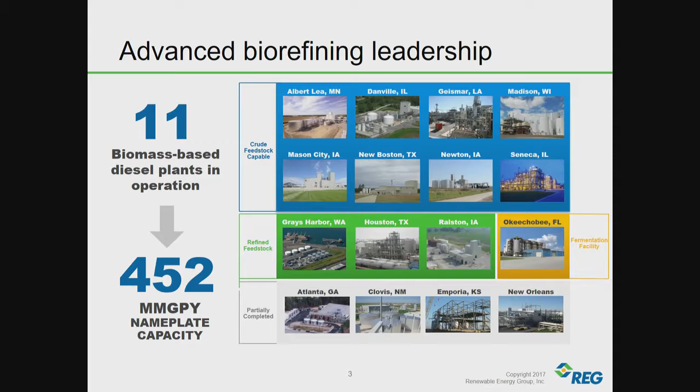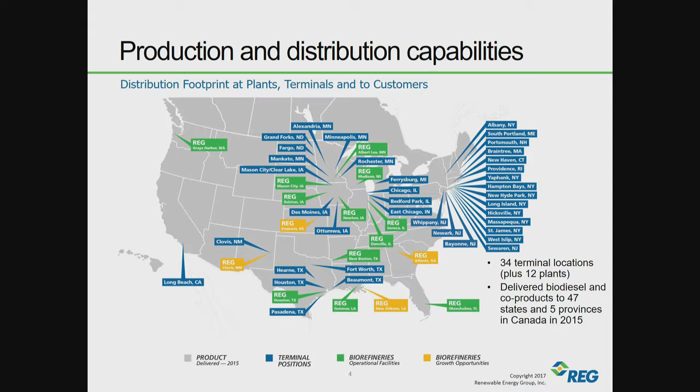And then one of those is a fermentation facility, which is a new technology for us in Okeechobee, Florida. It's kind of a pilot scale plant. We have production and distribution nationwide, so you can see the greens are production facilities, blues are terminals where we distribute material, and the yellows are the plants that are incomplete. So we are a nationwide company and a global company in that regard as well. We have a couple of plants that we own a significant majority of in Germany, so we do have international production and distribution now as well.

This is a photograph of the renewable hydrocarbon diesel plant in Geismar, Louisiana. This is our REG Geismar plant. I think it's worth looking at the picture. Those of you who've been in a conventional biodiesel plant can see right off the bat that it's a little bit different. It's very similar to petroleum processing, and I'll get into the details of how this works, and you'll see why. So a little bit different environment, a little bit different set of things to take care of. The plant's nameplate capacity is 75 million gallons per year. That's of all fuel products, and I'll explain what that means in a couple slides. And it is what we call a feedstock flexible plant; it can use both high and low free fatty acid feedstocks, crude or refined.

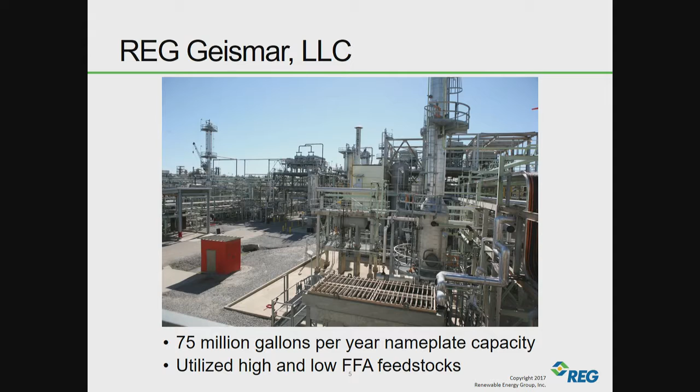So jumping right into a bit of vocabulary. There's some words that we use in the RHD industry that we don't normally hear in the biodiesel industry. First one is hydrocarbon, and this is actually an important word for fuels in general because hydrocarbon has been incorporated into the ASTM standard for diesel fuel. ASTM D975 recently clarified that diesel fuels are hydrocarbon oils. What that means is they're made up of molecules that consist only of carbon and hydrogen. Biodiesel is different. Biodiesel has oxygen in it. It's an oxygenate. So biodiesel or methyl esters would not actually be a hydrocarbon from that perspective. Hydrotreating is another very important word for making renewable hydrocarbon diesel. The way you get the atoms other than carbon and hydrogen out of a molecule is typically by hydrotreating. So we use hydrogen to remove non-carbon or non-hydrogen atoms.

And I noticed a lot of you still trickling in. There are some prime seats right up front here, and I will not be offended if you want to walk up there. I felt bad for those of you on this side of the room because the only screen's over here. So don't feel bad about just moving over, because I'm going to get to some pictures in a minute that might be a little bit hard to see from that side.

So we hydrotreat molecules to make them hydrocarbons. Think of it that way. There's a side effect, and it's a beneficial side effect. When you hydrotreat molecules, you can also remove double bonds.

The chemical term for that is saturating or saturation. So you turn an unsaturated molecule into a saturated molecule. I have a picture there that can show you what that looks like. Then the final step, after you've made a bunch of saturated hydrocarbons, very good materials, they burn great. The problem is the melting point is pretty high. Okay, you've heard paraffins. Most people hear the word paraffin, they think of candle wax, so something like that.

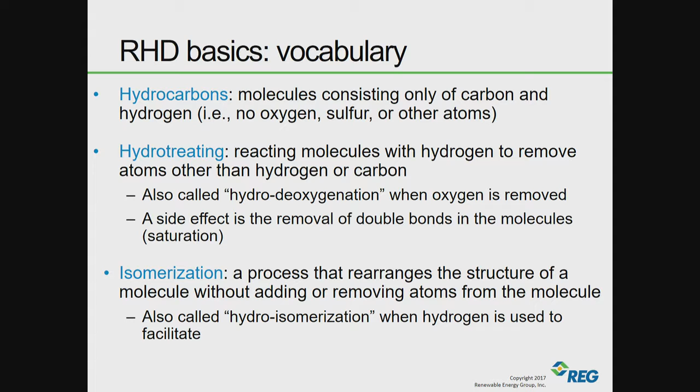So then the last step for making a good saleable fungible RHD product is to isomerize the molecules, and that has the effect of lowering the freezing point, the melting point. So it does that by rearranging the atoms in the molecule. It doesn't actually add or take away any atoms. That's the distinction between isomerizing and hydrotreating, for example. So just keep that in mind. You'll hear these words: hydrocarbons, hydrotreating, isomerization.

And now, the products. When we make biodiesel, everyone I hope in the room is aware, you make your esters, your methyl esters, or your ethyl esters, and then you have a glycerin co-product typically. The glycerin co-product is not in and of itself a great fuel. When you make RHD, all of your co-products are fuel products. So we make the RHD, which is the target product, the diesel cut.

We also get a naphtha cut, which is a gasoline blend stock, 100% renewable hydrocarbon gasoline blend stock. And then we get LPG, which is really mostly propane. So think propane for that LPG product. So you get 3 products out of an RHD plant. They're all fuel products.

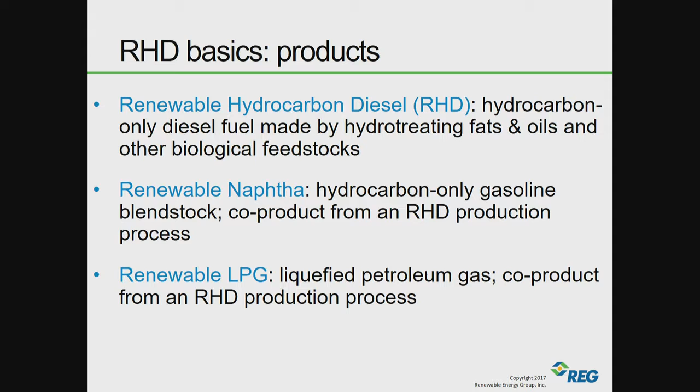Okay, now we're going to get back to, this is a quick intro slide just to show you the difference between biodiesel and renewable diesel. And I'm going to move over here so I can point.

Check, check. All right. Let me get on. That was loud before. How we doing? Nothing? Check, check. Yeah. Turn it off. Okay. Now I should be on in a second. No? Check, check, check. You want to try that one? Thank you. Check, check. That sounds more like it. Almost. Just a little more. All right. I'll just stand here. All right. Back to the mic. They worked before. You want to? Maybe you can get it going.

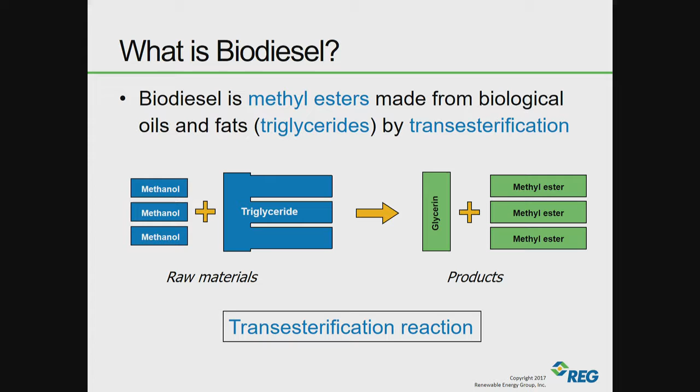All right. So think of making biodiesel. We start with triglycerides, which have 3 fatty acids connected by a glycerin group. We react with an alcohol, methanol. We end up making 3 methyl esters and a glycerin molecule. So hopefully this is relatively familiar to everybody. Okay, that's biodiesel. We call that reaction transesterification. We start with 2 raw materials. We end up with 2 product-type molecules.

So making renewable hydrocarbon diesel, we start with the same molecules, same feedstocks. In this case, we can use a triglyceride as our example. Instead of adding an alcohol now, we're adding hydrogen. We're using hydrogen to react with this. This is the hydrotreating process that I mentioned.

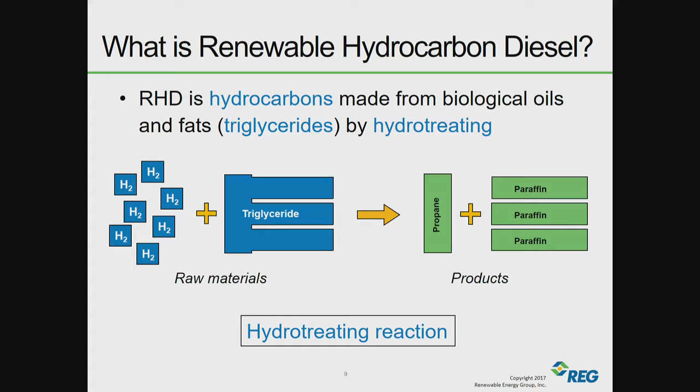1 or 2? I don't care.

That sounds like it's hot.

Okay. Free at last. All right, so what we have are 3 molecules of hydrogen can react with this glycerol portion of the triglyceride, 3 oxygens. That's what makes glycerol interesting, is it's a 3 oxygen containing alcohol. And the hydrogens come in and react with oxygen, and hopefully everybody in the room knows if you have 2 hydrogens and 1 oxygen, you know what that is. The non-chemist should even know this. You get H2O, right? Water.

So you remove oxygens using hydrogen and make water. So then that glycerol, instead of being glycerol, becomes propane. Propane is a 3-carbon hydrocarbon. So far so good, right?

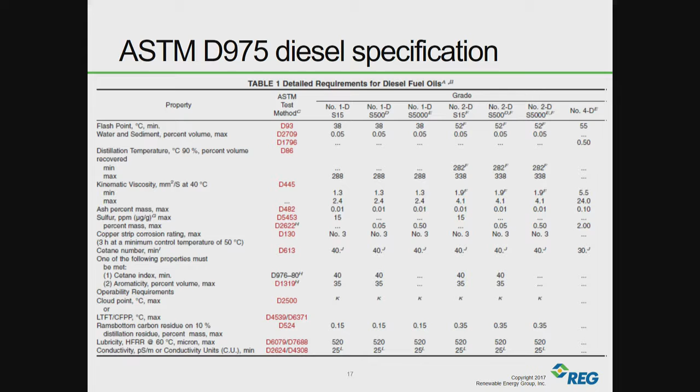All right, we're almost done. This is small, don't try to read this. I just wanted to show you. This is the ASTM D975 specification. So our diesel product has the same limits as D975, with the following exceptions. All the rest of them are the same.

Copper corrosion: it's a cleaner material, so it's a lower corrosivity. Sulfur is effectively 0, but we'll call it 2 max. Aromatics, there really are very few aromatics. We'll call that 2 max. Cetane is the big improvement. So when you do this to fats and oils, you make these paraffinic and isoparaffinic fuel mixtures, you get really high cetane. It could be as high as 80 cetane. It could be above 80 cetane.

We call a limit of 65 minimum because we don't want to go under our limit, but consistently it's in the mid-70s or higher. So think of this as a very high cetane, very clean burning, very high quality diesel material. And then the cloud point, because of the isomerization, we have negative 10 Celsius or lower, which, as I mentioned earlier, is the diesel winter pipeline spec.

So the several pipelines, they're not all exactly harmonized, but they're roughly negative 10 Celsius in the wintertime. In the summertime, that goes up. So we're running negative 10 or lower on the cloud point. So in that regard, you can see a little bit of an advantage over conventional biodiesel, where negative 10 would be an unattainably low cloud point for most biodiesels.

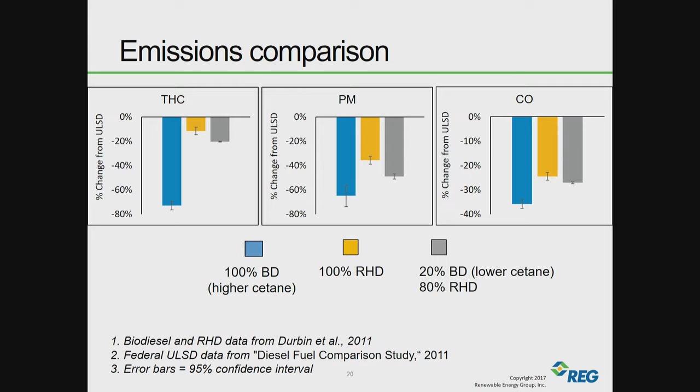I just wanted to know if you could share some reaction parameters as far as how this works, like temperatures, pressures, how RHD works. Well, I probably can't give you what you would like to hear. I can say that we do have a patented and trademarked process that we use at our facility, and so that is available if you're interested in talking about a potential plant. We would certainly be happy to talk to you about that. It is something that we can and would be willing to consider licensing.

Generally speaking, it's much higher temperature and much higher pressure than a biodiesel plant. We do transesterification at temperatures where methanol is liquid usually. Some processes are higher pressure and higher temperature. These have to be done under situations where we have a lot of hydrogen, so the pressure is much higher, temperature is much higher. The reaction times are typically shorter because it's a high temperature, high pressure reaction.

But I will caution everybody, you can't just take your biodiesel plant and turn it into an RHD plant. It's a very different kind of process. And typically the catalysts are solid catalysts. So there's that whole thing as well. Okay, thank you. Sure.

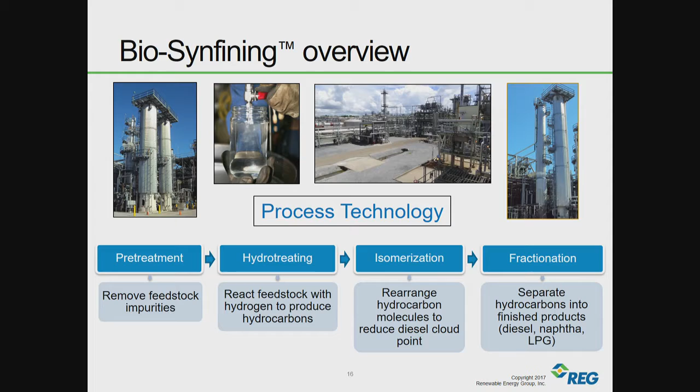Hi. What are the important specs for your feedstock? For the biodiesel, very low FFA is a good quality feedstock. For you, it doesn't really matter. So what are the parameters that you're looking for specifically on UCO? Yeah, well, I'll just use this slide as an example. So that's a good point.

With biodiesel, a conventional, old school, first generation biodiesel process would like a very low free fatty acid feedstock, meaning a feedstock with low FFA. And if the feedstock is not low FFA, your typical plant would have a process for reducing the free fatty acids. Making renewable hydrocarbon diesel, the FFA can be converted directly to the target molecule in the same reactor and the same conditions as the triglycerides.

Yeah, really the important part, as with any process, is to take out the other impurities. You know, water cannot be converted into fuel no matter what you do, right? Solids cannot be converted into fuel. We don't like to have a lot of heterogeneity in the feedstock. So as with all of our biodiesel plants, one of the areas we focus on of primary importance is what we call pretreatment, or refining the incoming feedstocks.

The big difference with the renewable hydrocarbon diesel plant is we don't need to worry about taking out the free fatty acids. Is that what you're looking for? Yeah, but I understand chlorides are a problem also, and I'm trying to make my feedstock good for you.

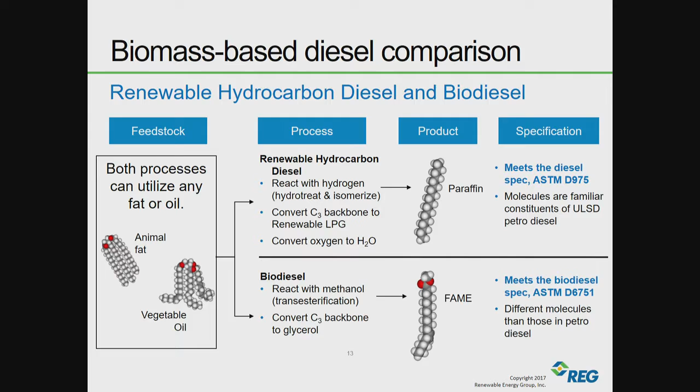Why don't we start in the front again? As you were mentioning the synergy between biodiesel and this fuel in the point of lubricity, I was wondering, is there also a synergy maybe on the cloud point? So, potential synergy, blending these two to get like a eutectic or an extra low melting point? Not exactly that, but at least to move the biodiesel cloud point in the desired direction. Oh, sure. So that's a good point.

If you look at the renewable hydrocarbon diesel as having a cloud point of -10 to maybe -20 Celsius, it does then, of course, give you an intermediate cloud point between the biodiesel and the renewable hydrocarbon diesel. So is it more or less linear depending on the blending level? Is there any data already? It's not perfectly linear, but it's good enough to estimate. So you can estimate the cloud point of the finished fuel based on the cloud points of the two starting materials.

Two questions for you, Dave. One, what is the split? How much propane, how much diesel, how much naphtha do you get out of this process? So the actual details, of course, I can't tell you without having to kill you, and I don't want to do that. Is it one propane, three diesel, two naphtha type operation?

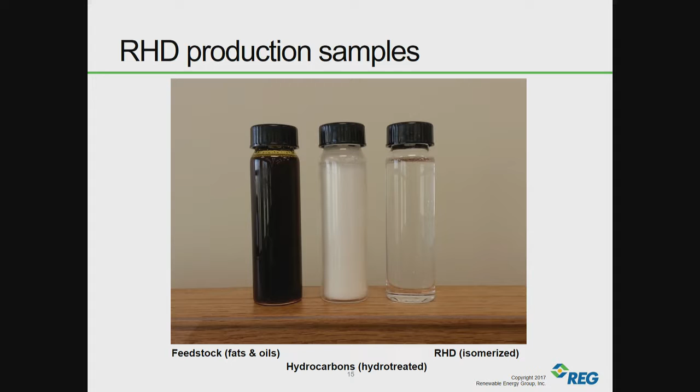So if we get back to the molecules, as I said, if you're feeding it triglycerides, we are always going to get propane. You can do the math on that, the weight of glycerin. You lose a little bit of mass making glycerol into propane, but you could do the math on that. So you get that much propane. After that, how much of the naphtha cut versus the diesel cut is an operational parameter. Every producer is probably going to have a different split, so I can't share what those are.

But I can generally say that right now, under current market situations, the diesel component is a more valuable product than the naphtha product. That may change in the future. And if that happened, we could operate differently to make more of one or the other. So it's definitely an economic decision. It is an economic decision, definitely.

That's correct. One other question, the naphtha, is that available in pipe, or are you putting that out by rail? Right now, it has to be shipped by truck or rail, yes. And it's essentially a paraffinic naphtha cut material. So you could consider it as a blend stock for gasoline, but in and of itself, it doesn't meet the octane requirements. Is it a low RVP? That's a good question. I don't know what would be considered low and high, but we can talk afterward. Actually, the guy right next to you might be able to answer that. But he may not know either.

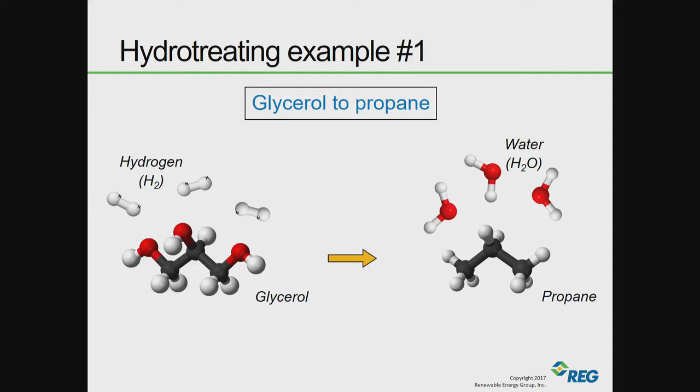You can burn veg oil in a diesel engine, everyone knows that. That doesn't mean that the emissions coming out of the tailpipe are going to be all that desirable. As a matter of fact, they are undesirable in some ways. So burning veg oil is not the same as burning paraffinic hydrocarbons with a cetane of 75 plus. So keep that in mind. There are people that have pathways and are able to sell these with RINs, the veg oils, so it's not like they're going to disappear anytime soon.

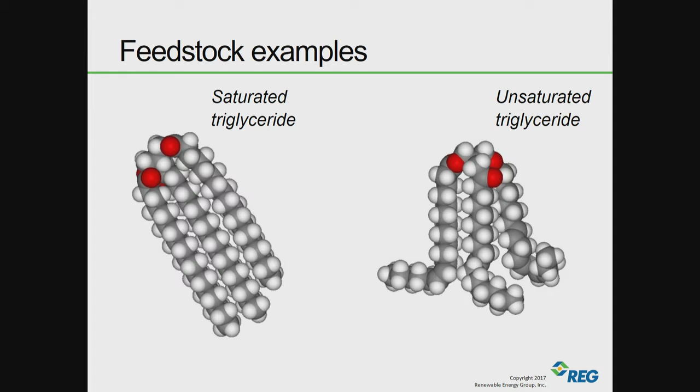Can you comment on the relative cost of produced RHD derived from the same feedstocks versus biodiesel? I probably can't comment specifically. I can say that you made an important caveat there, which was for the same feedstocks, because the majority of the cost of making biodiesel and the majority of the cost of making RHD are both feedstock costs. So that is consistent amongst the two products.

Because the free fatty acids can be converted directly to your product fuel without additional technology, there can be an actual savings there. The plant itself is a little bit more expensive to build and operate because of the temperatures and pressures involved. So I really can't give you a satisfactory answer probably. But you can talk to me afterward. Okay, thanks.

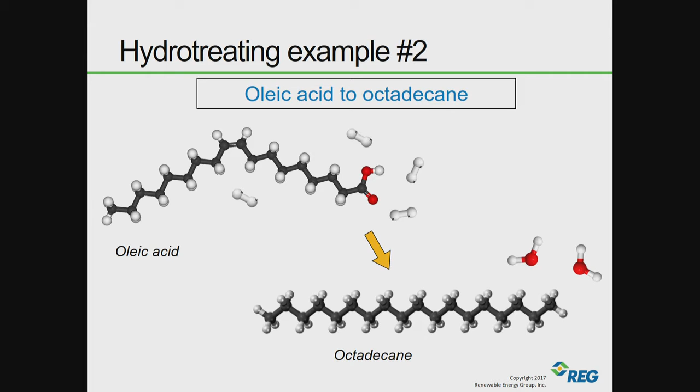My question is toxicity. I noticed that your renewable diesel does not smell as strong as diesel fuel, but if you just put it on the ground, is it going to have the same toxicity as diesel? So that is a good question. Strictly speaking, it is almost entirely paraffinic. Paraffins, mineral oil, Vaseline, petroleum paraffins are used in all sorts of care products that are even ingested by people or put on people's skin. So the paraffinic portion of it is non-toxic.

It does have a very small amount of aromatics. The aromatics are typically the most hazardous portion of diesel fuel, of conventional petroleum diesel fuel. So it is significantly less toxic than petroleum diesel fuel, but it would still be handled as a hydrocarbon diesel fuel material from a spill containment and cleanup standpoint, just because of the small amounts.

Now that could vary, I'm not an expert on this, from state to state or region to region, but you're correct that it doesn't have the smell because it doesn't have the aromatics. Aromatics actually got their name because you can smell them, but they are a certain category of molecule that have been associated with toxic effects and carcinogenic effects.